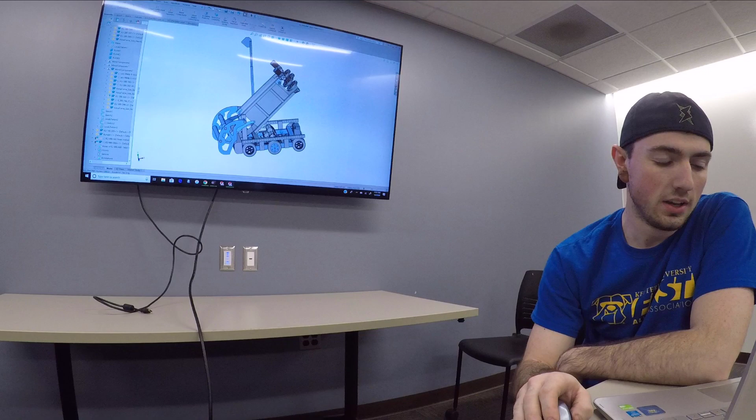So this is our 2020 robot 3D design so far. Most of it is, we're moving on to manufacturing right now. The climber is still in prototype mode, but I'll just kind of go through the features that we have here. So we'll start with the chassis. That's kind of one of the most important parts of any robot.

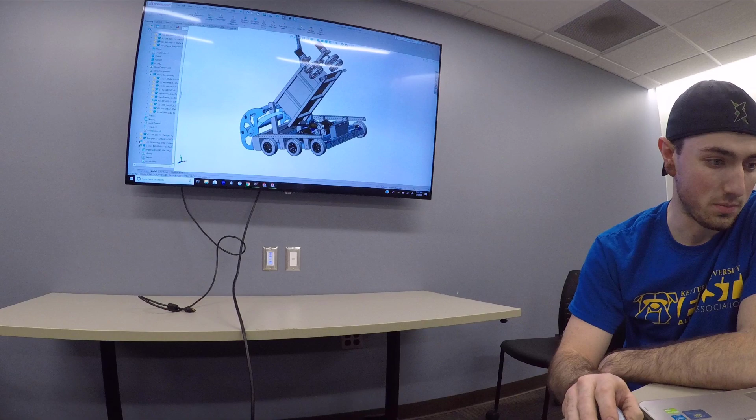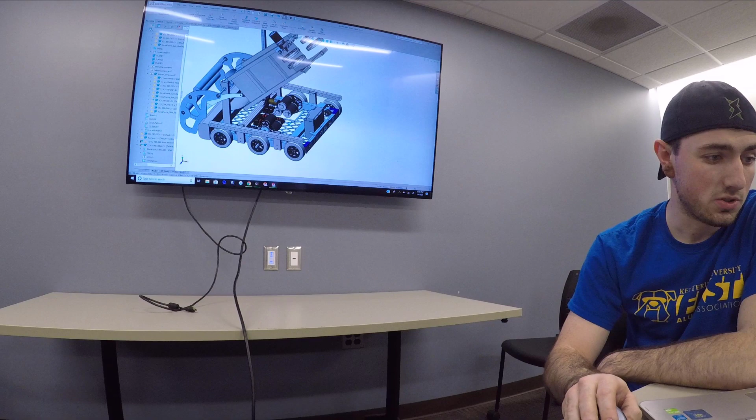We have just a regular standard West Coast drive. We're using 6-inch pneumatic wheels. We're using 35 chain on the drivetrain. We have cam tensioners to keep the chain tension, so we don't lose tension there and don't slip and drop a chain. We wanted to use pneumatic wheels because we thought it might cushion going over the bumps on the midfield, the bumps that are underneath the climbing tower there. So that's kind of our reason behind that.

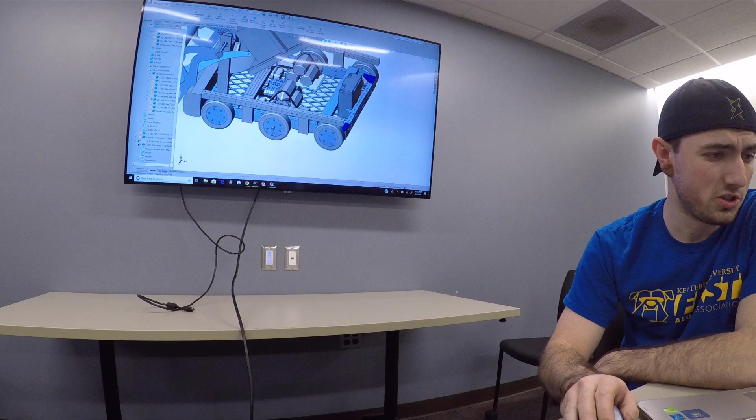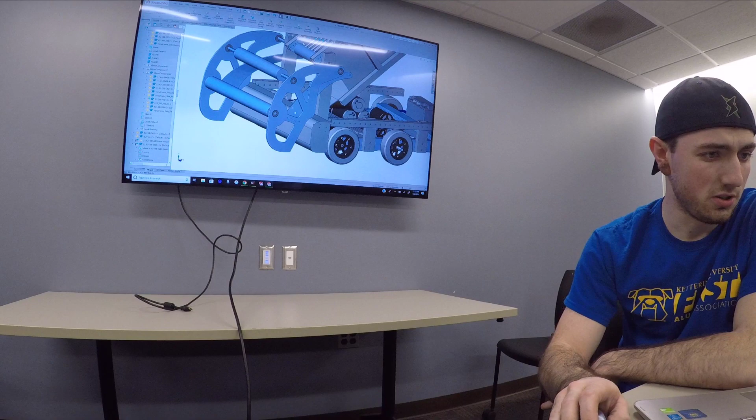Our electronics will be mounted in our base plate down here, and these are just single speed transmissions. It's around 12 feet per second. So we decided to do an over the bumper intake. It simplifies our bumpers so we can just have one piece going all the way around. Right now it's just modeled as this so we can see dimensions and fits. But it just makes it a little bit simpler, and with these size balls, it makes more sense to go up and over the bumper.

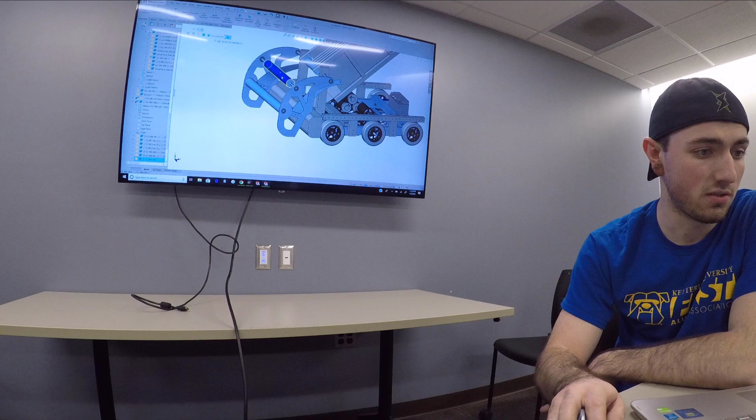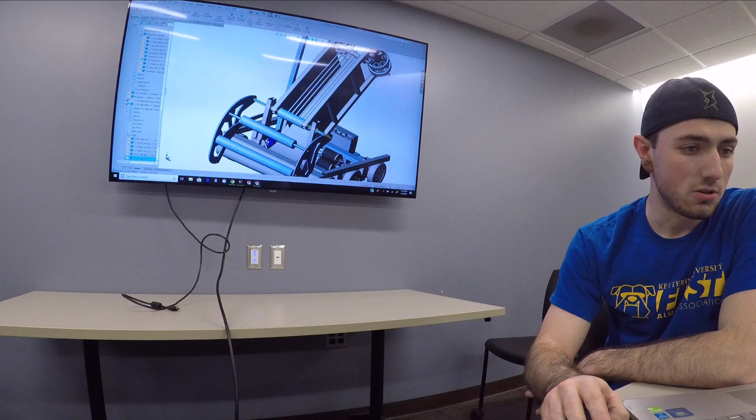We're using 2 rollers on the intake, these 2 right here. They're going to be either belted or chained together, possibly using polycord also, or sort of like surgical tubing. We're still in the process of making that and testing it out. A unique thing is we have polycord right here we're going to be using to drive the balls up this box, basically, up to the shooter wheels. And it's all going to be connected by this central shaft right here. We'll be driving the shaft with the gearbox and motor, and it's going to drive both the intake wheels and the hopper mechanism. So we can just run that constantly, and when we're intaking balls, balls will move up in queue.

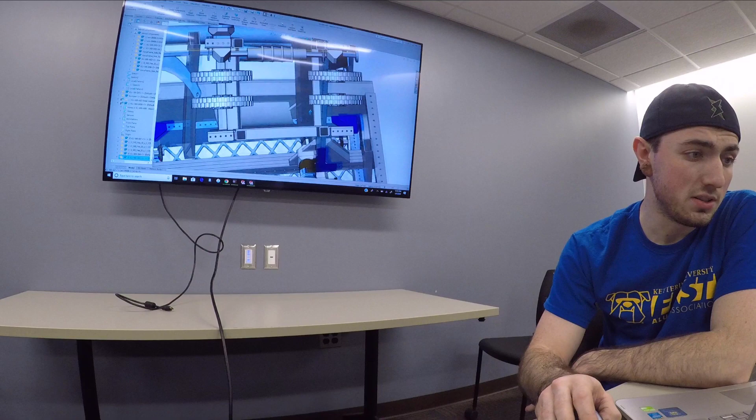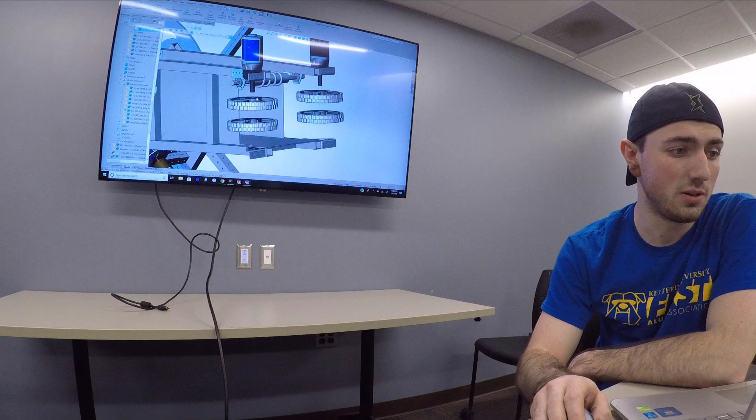For our shooter, we have 4 6-inch traction wheels, the AndyMark ones you see in the kit of parts. Right now we're still playing with the distance between them a little bit. That controls our compression on the ball, if we move them closer to each other or farther apart. They come from a VersaPlanetary, the 3-to-1 from a mini CIM up here. Each side is individually driven. We figured 3-to-1 from that mini CIM would be a pretty decent reduction. From testing that we've seen, it is, and it works pretty well. So that's basically the gist of it.

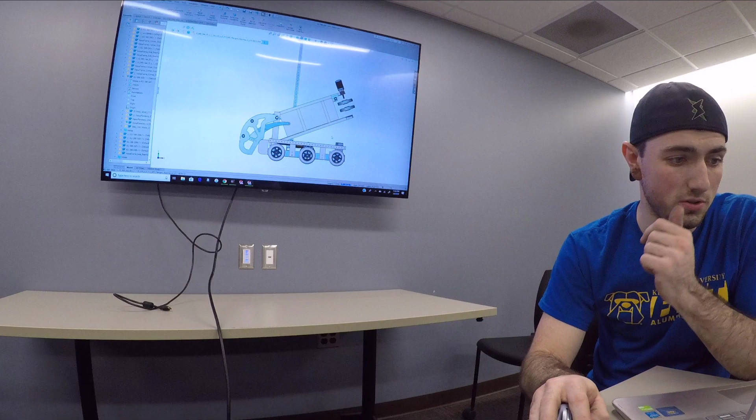We're going to be able to rotate this when we're tuning our shooter and adjusting where our shot is. This actually pivots back off the intake shaft also. So this centralized shaft right here serves 3 major purposes: driving the hopper and driving the intake rollers, but it also serves as the rotation point for our shooter. And we'll be placing it in a location that makes most sense when we're adjusting the shooter. We'll just be putting a bar in here.

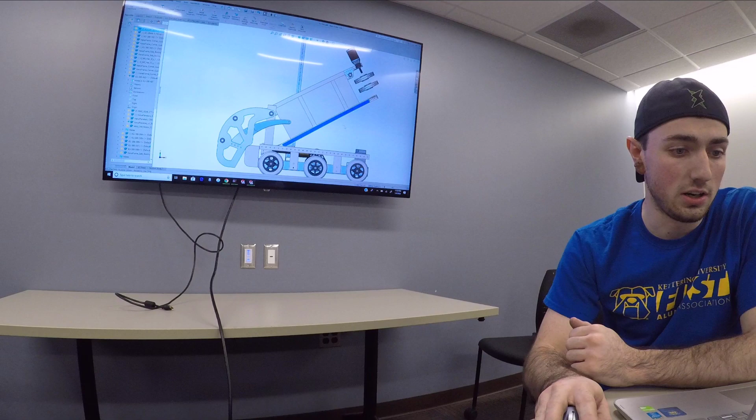So our climber, we're still developing a little bit, but we're trying to do a linear slide thing where it will come out of the tube with a latch, kind of like a carabiner latch. It'll latch on the bar, and we'll just lift ourselves off the ground for some quick points.

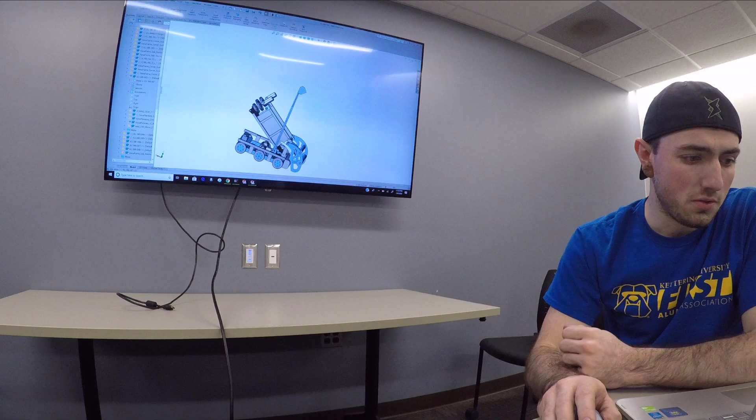Most of the robot was designed using VEX VersaFrame tubing and VersaFrame stock. Some of the stuff is being CNC'd, like these plates here; we have access to a CNC router. We're actually actively cutting them right now, so getting ready to put those together. We enjoy using VEX parts; we just like the pre-drilled holes and everything. But that's about all we have.